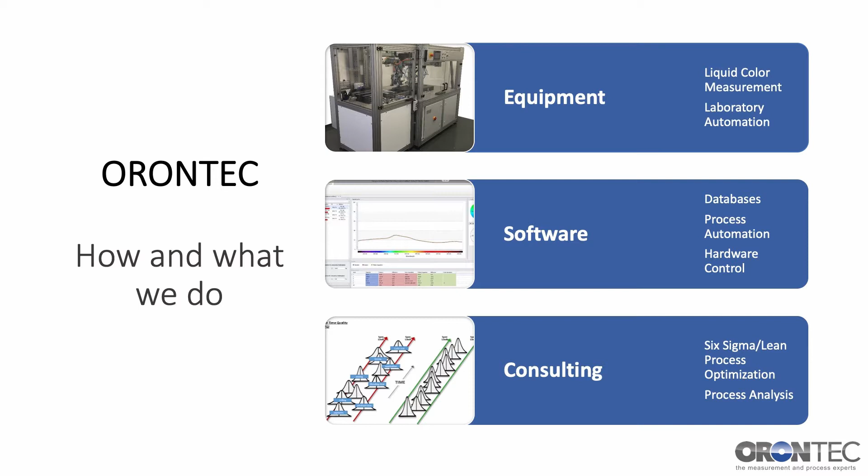We also supply laboratory automation solutions, such as our surface scanner, for replacing manual measurements with automated measurements. Second, software. Our customers get modern software solutions to help them automate their workflows, generate reliable data, and integrate hardware according to the Industry 4.0 concept. Third, consulting. Using methods of Lean Six Sigma and others, we carry out process analysis and optimization.

Why did we invent the Q-Chain SuMo technology? Well, if you look at the state-of-the-art methods consisting of scratching, stressing, and scraping, you see that scraping and measurement are manual tasks which are boring and imprecise. The deficits are obvious. The destructiveness of the method makes it impossible to reuse a sample. The results have a high user influence, and it is simply a waste of time and money.

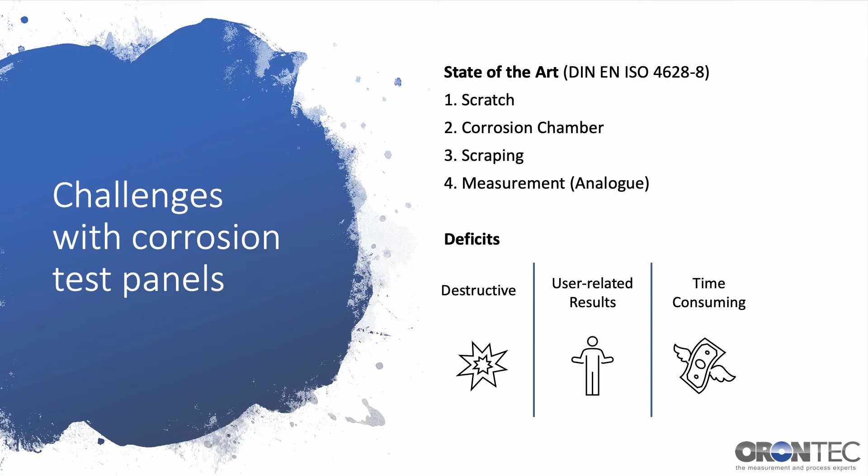What is the solution? Well, we designed a compact piece of equipment called Q-Chain SuMo. This technology compensates the deficits of the common corrosion test panel measurement. It is a small, compact device which fits on a lab bench, and it is capable to handle 20 panels for automatic measurements. The panels are stacked in handy magazines which help to store the panels and easily move them in packs of 20 in the laboratory.

The sensor is based on thermography. This method is extremely precise and robust for a large variety of materials. The software which comes with the equipment is intuitive and easy to use. Reporting is generated automatically and always connected with a picture of the sample. The evaluation is flexible and meets all international standards.

The sensor can detect delamination and rust on a panel, but doesn't damage the surface because it is touchless. That's why the method is non-destructive and allows a reuse of panels, for example, for the measurement and evaluation of sample series. Q-Chain SuMo is ready to connect to our Process AI framework, a solution for workflow automation in laboratories. So, what is the Process AI?

Q-Chain Process AI is a workflow-based software solution for any kind of laboratory processes. It connects all steps of a testing process in a web interface and makes it possible to combine automatic measurement devices as well as manual processes. Additionally, it can connect to other existing data sources like ERP systems, LIMS systems, and even Excel files, databases, or just text files. However, it uses a central database to collect all relevant data and makes it possible to use digital and traceable data over the whole process.

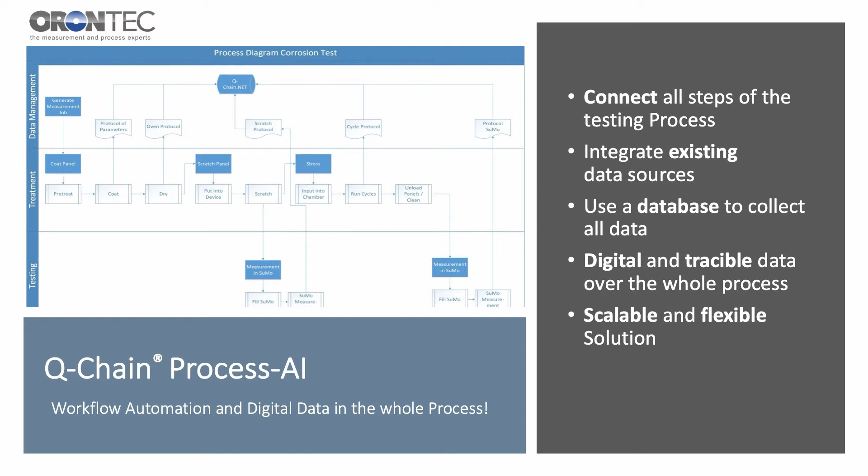Here is a short summary of part 1 of this presentation. Q-Chain SuMo is an automation solution in a compact equipment, which replaces boring and expensive work. The non-destructive and precise measurement method enables the reuse of panels and makes test results more objective. Data is digitalized and available for further digital analysis.

The system is ready for the integration into the revolutionary Process AI framework for workflow automation and integration of further testing equipment. Thank you for your attention until this point.

If you are interested in more details, stay with me for another 10 minutes. Are you still interested? Great! I will explain to you more details about the measurement principle, the design of the machine, and the most important software features. This takes another 10 minutes of time.

The measurement principle of the sensor, which is built into the SuMo, is based on thermography. The sensor itself is an active sensor which uses a laser pulse to heat up the surface of the panel, or more precisely, the coating layer. The coated surface is absorbing the laser radiation and transforms it into a three-dimensional heat wave. The temperature of this heat wave is measured by an integrated heat sensor.

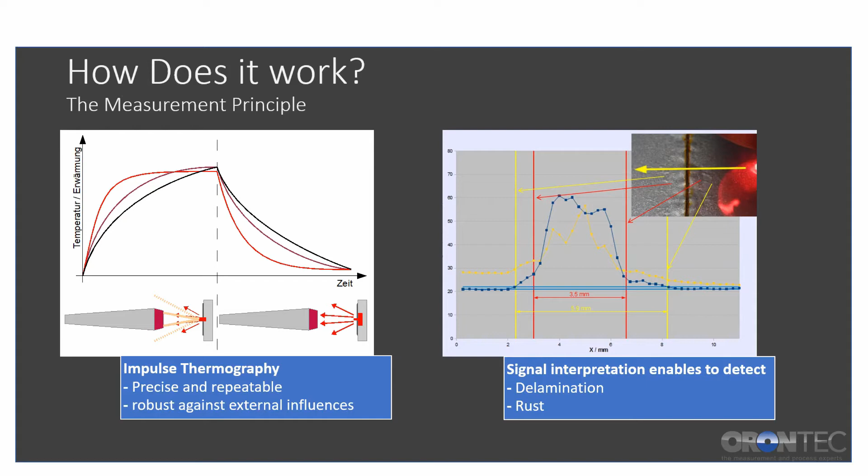The measurement signal consists of a temperature against time plot. As the laser is pulsed, the plot shows one pulse; the temperature increases during the time when the laser is on and decreases when it is off. This temperature plot is characteristic for the physical properties of the coated layer and, for this specific purpose, it can be used to detect changes in the layer generated from delamination and rust.

How does the Q-Chain SuMo work? The sensor, number 5, is mounted on an XY axis system, and its distance to the panel is adjusted by a Z-axis. The input magazine, number 1, takes 20 panels, as well as the output magazine. The magazines are mobile, which makes it possible to use them outside of the machine for loading and unloading the panels and use them as a buffer for panel series.

A conveyor belt, number 2, pulls the panels from the input magazine to the measurement position, number 8, where the sensor carries out the measurements. A camera, number 6, takes a picture of the panel, and it also detects a QR code on the panel. After the measurement, the conveyor belt pushes the panel into the output magazine, number 3.

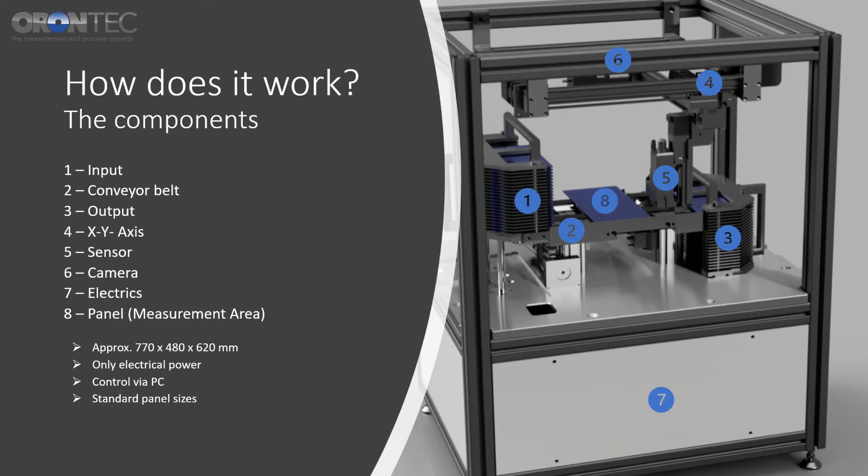The size of the equipment is 770 millimeters in height, 480 millimeters in depth, and 620 millimeters in width. Underneath the measurement area, all electronics are integrated. The machine needs only electrical power and is controlled by a conventional Windows PC. The setup is designed for standard panel sizes with a certain variance.

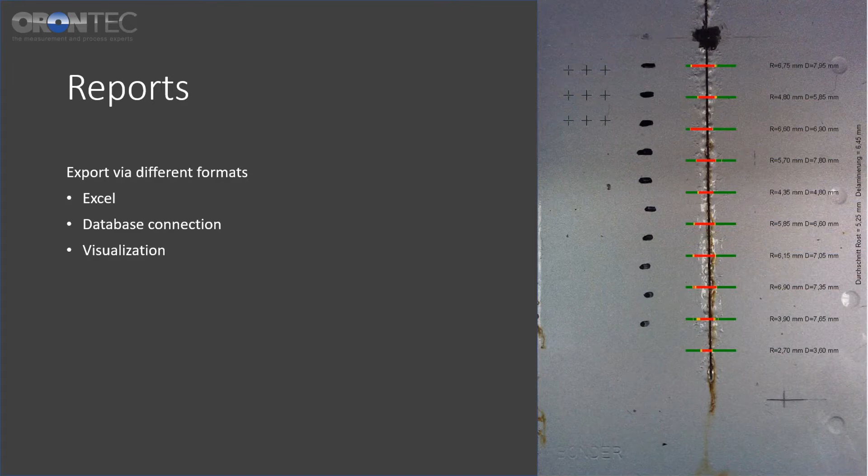When it comes to the reports of the measurements, the results are shown in a picture highlighting delamination in yellow and rust in red. Stripes with green color show areas with normal adhesion of the coating on the substrate. All measurement data is saved in a database. Reports are generated in an MS Excel format.

Here is an example of a report according to the ISO 4628-8 standard, which consists of the colorized picture, the evaluation, average width with delamination, and the data of each measured line. The picture is part of the Excel report.

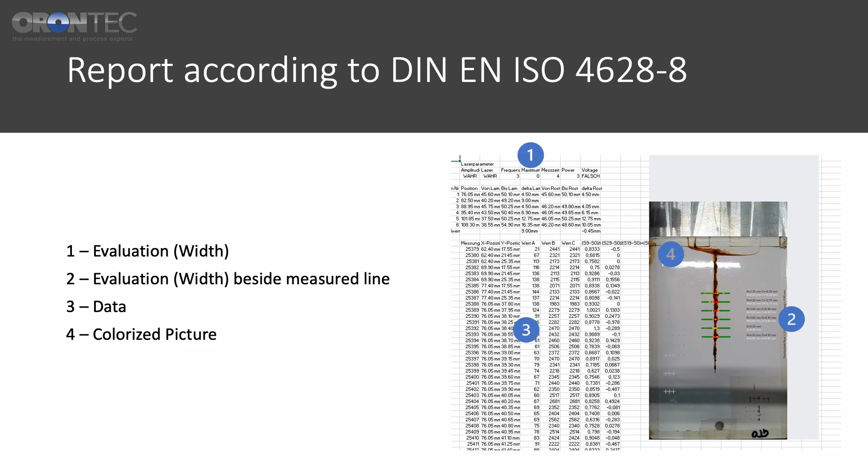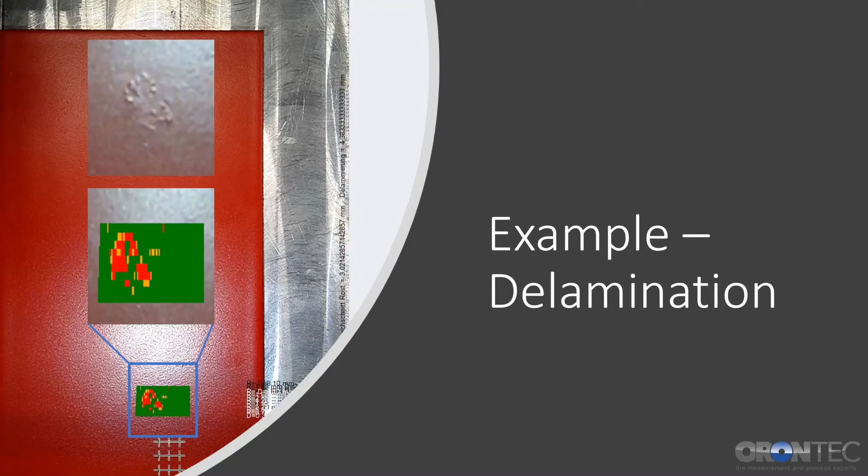This example is a panel from a powder coating application, and we made this test to see how much a pure visual inspection can detect delamination of coating layers. There have been attempts to just use visual inspection on unscraped panels, but this example shows the limits of such an approach. Due to the texture on the surface, it wouldn't be possible to analyze the surface exactly enough.

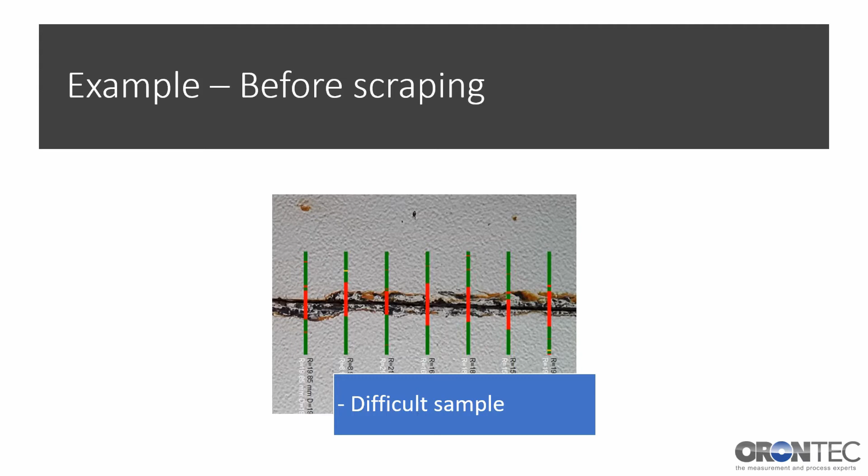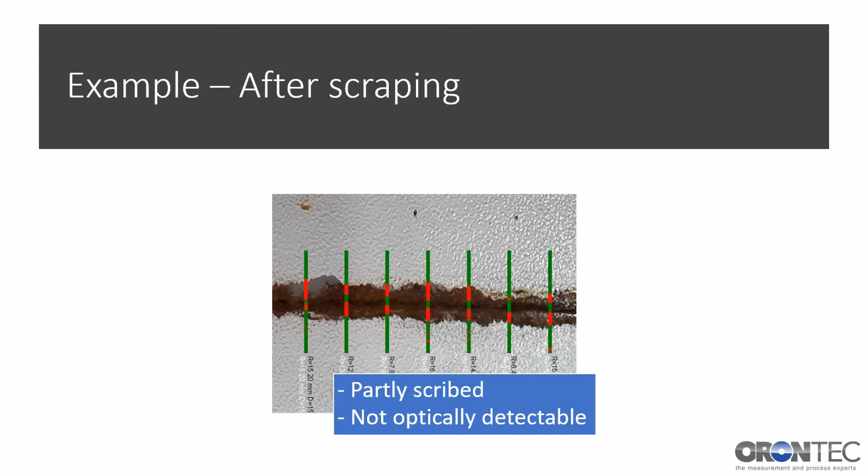The red and yellow areas show that the delamination and rust is broader than what the human eye or a camera would be able to detect. On the scraped panel, we were able to prove that the original interpretation was correct. So we were able to prove that the measurement principle we use in the SuMo is the most reliable and most precise way to detect delamination and rust on unscraped panels in a high resolution.

Not all corrosion tests are carried out on standard panels. In case of larger panels and/or flexible panel sizes, we designed a study which uses a different panel handling system. The panels are put into cassettes, which are pushed into a stack system as shown in the picture on the top, number 1. This setup can potentially take more than 20 panels, but will need more space and will be placed on the floor.

Another possibility is the measurement of 3D parts. The Q-Chain SuMo 3D study is a modified standard machine from ORONTEC, where the sensor is moved on a multi-axis system and the part itself is fixed in the middle of the machine. This setup needs more space, but it can be used for a large variety of parts. Both systems would be individual setups which would require higher investment budgets than the standard Q-Chain SuMo.

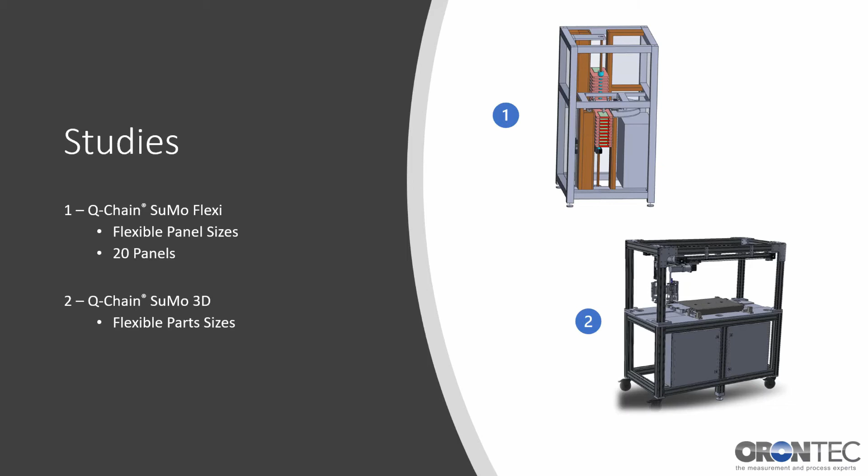We thought that it is not enough to just provide a measurement tool. It is a tool and not yet a solution. To make it a solution, it needs a framework which makes it possible to be integrated into the environment of a customer process. One of the product lines of ORONTEC is the process automation solution Q-Chain Process AI, which automates workflows. A lot of work in laboratories is routine work, which uses the same measurement instruments, the same instructions, and even the same reports. In an environment of so much standard work, automation is just a logical next step.

But let's start with a simple workflow. The measurement of, say, a corrosion panel is started and the machine loads it and conveys it to the measurement position. After reading the QR code, this code is matched to an existing so-called measurement job, which tells the machine what to do. After the measurement is carried out, the data is saved and a report is generated automatically while the panel is pushed back into the magazine in parallel.

So far, so good. If we go to a higher level, we may think about what is necessary to feed the database with measurement jobs. We need a software solution which connects a standard measurement grid, which we call template, with a specific QR code and additional information, such as the used material or a test ID or a customer number.

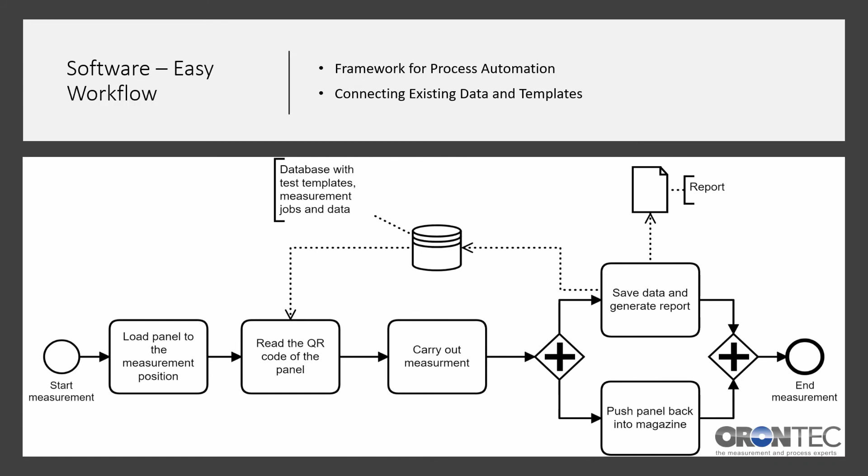Generating measurement jobs is also a standard process, and you can see that it uses the same database as the standard process of the measurement itself. The operator selects an existing template, connects it with parameters, and generates a QR code as an identifier of the sample. But this procedure is also a standard procedure of any other panel testing process.

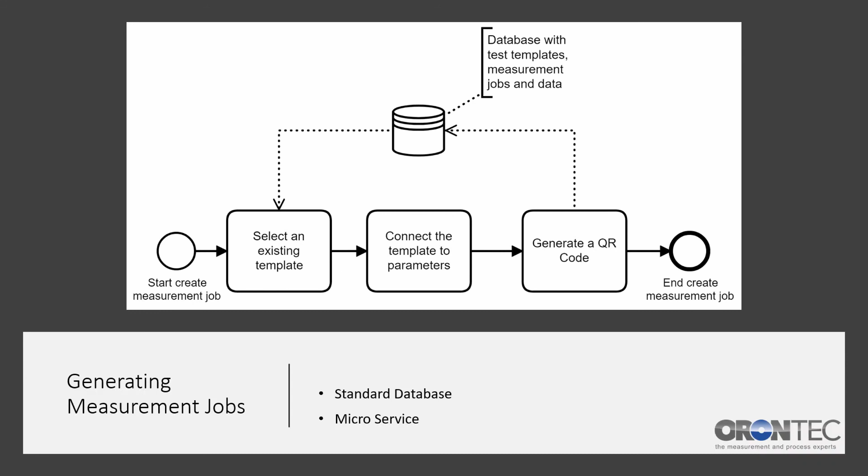The flexibility of the Process AI framework makes it possible to integrate data from existing applications, such as ERP, LIMS, or other data sources, use interfaces to automatically pull data from the equipment or instrument, and provide a user interface for manual data entries, for example, if the scribing is done manually.

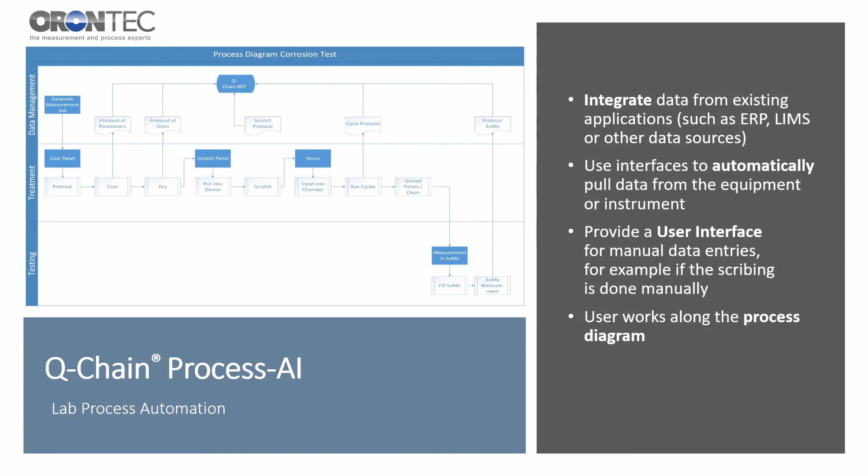The user of this software solution is working along the process diagram, in contrast to several separated programs. A step in the workflow may open a specific software, but once the application is closed, the user continues in the process diagram. If decisions are made in the workflow, these decisions can be automated by Process AI with underlying machine learning algorithms. The application is 100% web-based and easy to use. It can be expanded to other processes due to its flexible design.

To summarize the possibilities of Q-Chain SuMo, it is an automation solution. Due to the non-destructive nature of the test, it allows a reuse of test panels and no scraping of the panel is necessary. The automation and the sensor result in much better R&R values than the manual process. As an additional feature, it is possible to use the method for scribed test panels before the corrosion cabinet in order to detect delaminated areas caused by the scribing process itself. It is ready to use for the Process AI framework, and it is a tool to digitalize test results.